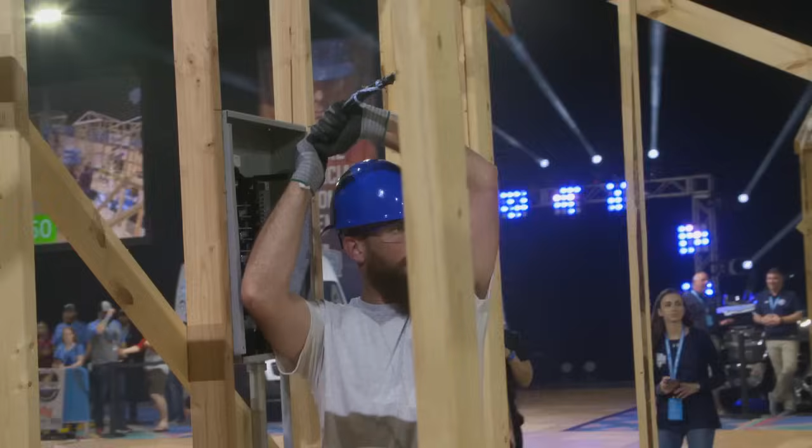The floor is set and the crowd is charged for the 2019 Ideal Electricians National Championship. Welcome, all you wire nuts. I'm Jason Benetti here with the always electrifying Scott Karen. The greatest electricians are here vying to be named this year's Ideal Electricians National Champion.

Scott, this year the competition is bigger and better than ever. And this year, Jason, on a global scale, electricians from 4 different countries have spent the past few months qualifying for a chance to compete for their share of over $600,000 in cash and prizes.

That's exactly right, Scott. Now here's what's in store for us today. We'll kick things off with the Student Apprentice School Challenge. We'll see the nation's top journeymen compete in the Professional Contractor Challenge. Then it's the Student Apprentice and Professional Individual competitions, and we'll round it out with that brand new competition this year, the International Finals, where the top electricians from the United States, Canada, China, and Australia will go head-to-head to crown the best electrician on Earth.

The National Championship is created by Ideal. It's for electricians, by electricians. And the school of the winning student apprentice team is getting 5 first-year scholarships for aspiring electricians.

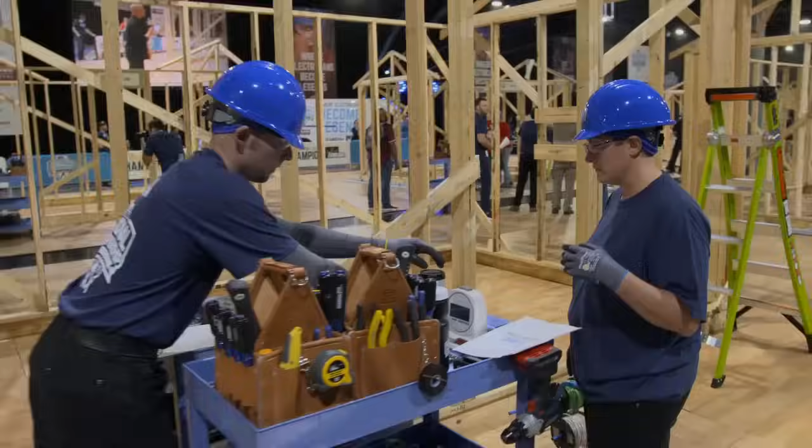All right, time to head to the floor. The student apprentice teams are about ready to kick off the school challenge. 2, 1. Countdown is on, and here we go. First step, they're breaking out the bundles of PVC to make sure they can start laying things out, measuring it. You can see he's got the electrical panel in his hand.

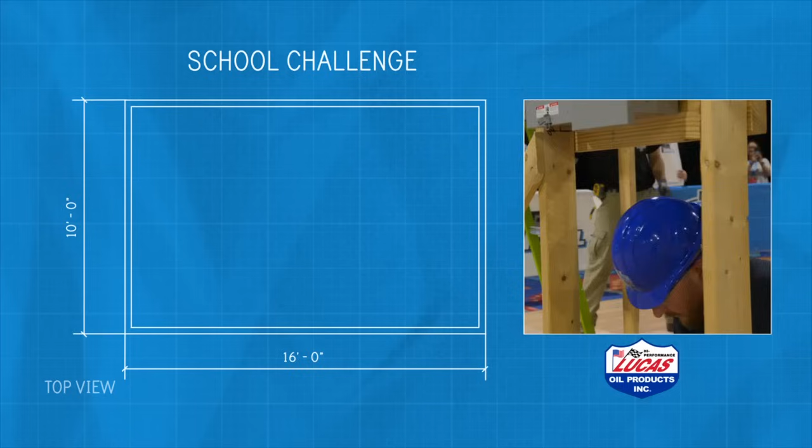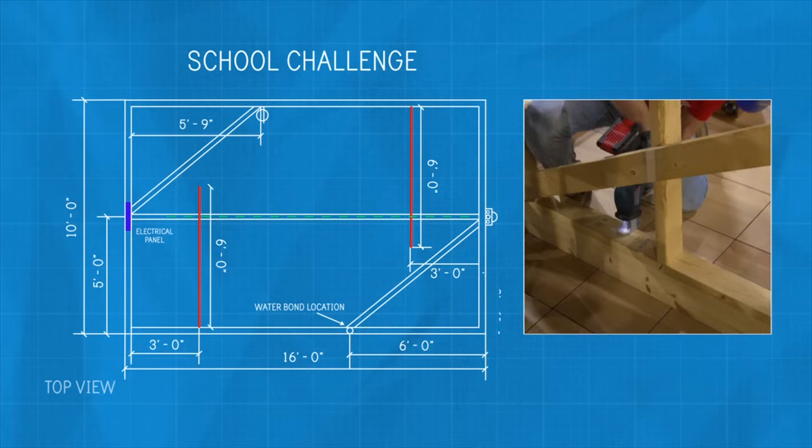Scott, let's take a look at the schematic breakdown of the Student Apprentice School Challenge, brought to you by Lucas Oil. For the Student Apprentice School Challenge, they're doing under-slab work on a simulated housing structure. They'll need to first install an electrical panel. From there, they'll run pre-bent PVC conduit to a service receptacle across the ground to the meter main. From there, they'll install a PVC stub, PVC conduit to the location of the cold water bond, and 2 raceways for future electrical installation. Conductors will need to be run from the meter to the electrical panel, ground rod, and cold water bond. For this, they'll have only 60 minutes. All work must meet National Electrical Code standards.

Let's meet a few student apprentice teams. Scott, we've got some new faces here up against some Ideal champions. Team 575, JATC out of Portsmouth, Ohio, Justin Donley and Jordan Finfrock. This is the talented duo. Jordan competed last year, and he looks ready to break out. This is Justin Donley's first year competing at championship weekend, but I'll tell you, these guys really have a good vibe together. And more talent from the north.

Team Clydesdale out of Minneapolis, Yufeng Yang and Brandon Moss. Appropriately named, too, because they are the dark horse. They've got the speed and energy it's going to take to tackle this thing. Don't count them out. We wouldn't dare do that. The Tenacious Turtles out of Minneapolis, Angela Bissonette-Penna and Jacob Thonis. These are the favorites this year.

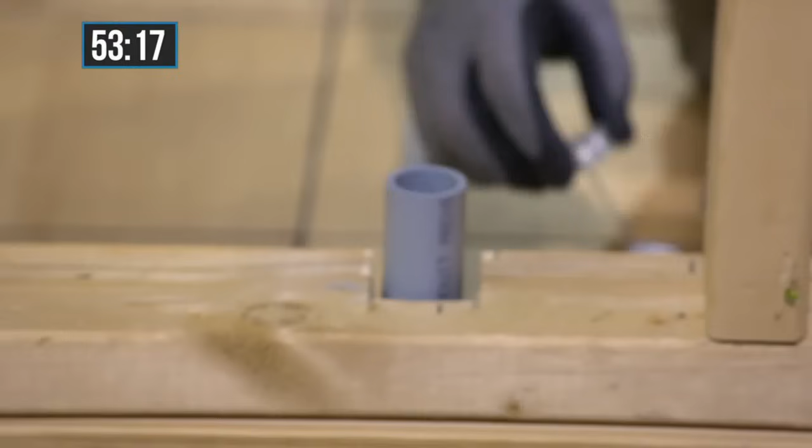All right, now Scott, they're working with some raceway here. Can you tell me what we're seeing? They're using PVC conduit right now, Jason, and what they're going to be doing is sealing it so they can get a really tight fitting.

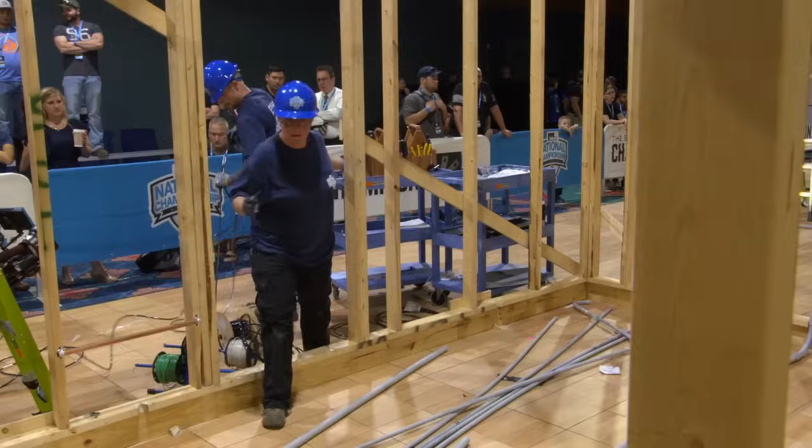The Tenacious Turtles are doing a great job here as well. You can see Angie, they're going to be sealing it with some PVC glue so you have no moisture getting in. When you're working with electricity, you can't have any sort of moisture in that PVC conduit. When you glue that PVC, it takes seconds to set up, and you can't undo it. They only gave him a little bit of pipe, not enough to make a bunch of mistakes.

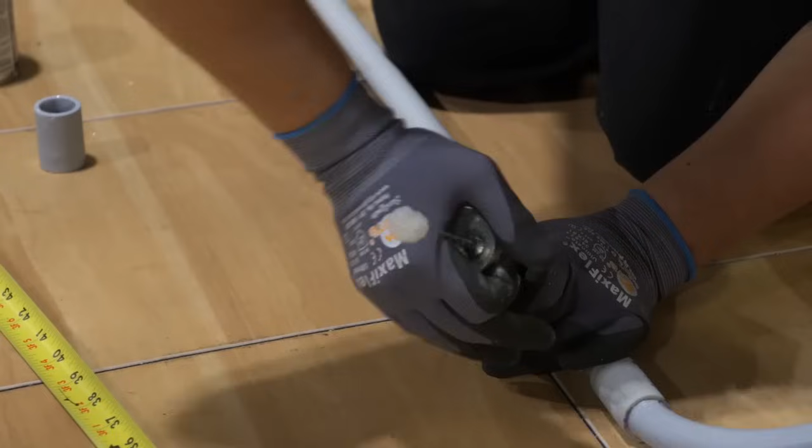You can see that Angie is making sure she's getting a nice tight fit on that pipe, and they got this stud knocked out. Looks like you came from the back, right? Yeah, and we're going down to the floor now.

Our third member of our team, Chip Wade, for an update about what's going on. Chip? The students and apprentices are really hard at work, and they've got a tall order. I can tell the thinking is just now starting to turn into action because their hands are all busy, and I can tell you they're all a little bit stressed. Back to you, Jason and Scott.

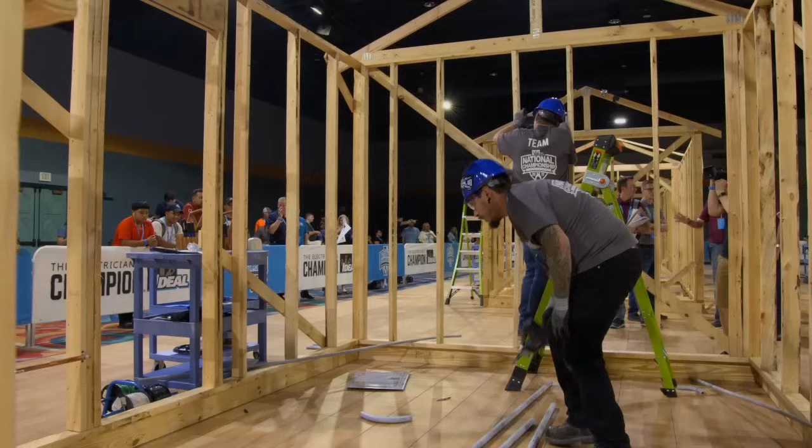Yeah, these competitors sure are pouring their hearts and souls into this competition. You can see it down on the floor. Now, in the electrical trade, electricians spend 4 to 5 years, depending on where you are, as a student apprentice, working and going to school simultaneously. Then, after completing the apprenticeship, they become professionals, known in the trade as journeymen. Becoming a journeyman is not easy to achieve, it's a big accomplishment to get there. They've put in years of tireless work and study to earn that license. So when they achieve that, they've truly earned something big.

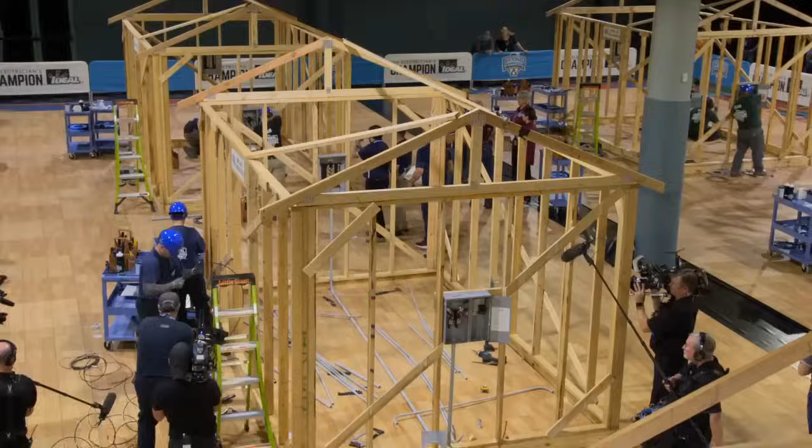The judges are accomplished as well. They're both union and merit-based electricians and instructors selected from training schools all across the country to be a part of the championship weekend. When we come back, we'll find out who wins the hard-fought Student Apprentice School Challenge.

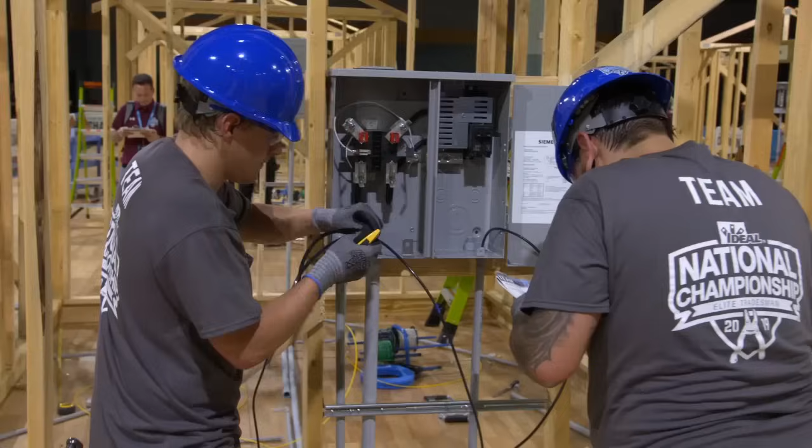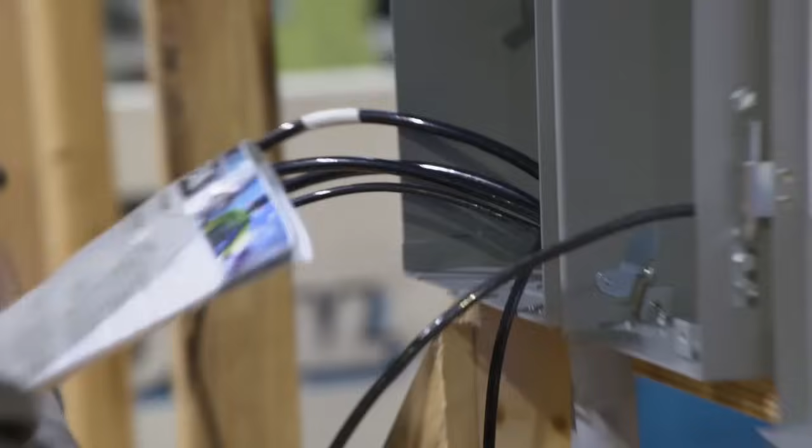And there's Daniel Becerra, who can be seen in that series working today alongside his teammate Troy Kanan as they're putting the finishing touches on their build-out here in the Student Apprentice School Challenge.

We are in the final moments, 20 seconds remaining. What are the finishing touches here? You got to get those wires on the devices right. He's torquing down those lugs. Once you set the torque, you're supposed to write the torque on the panel itself in marker, and you can see that he's really wrestling with that wire, making sure that everything gets bent and put in there.

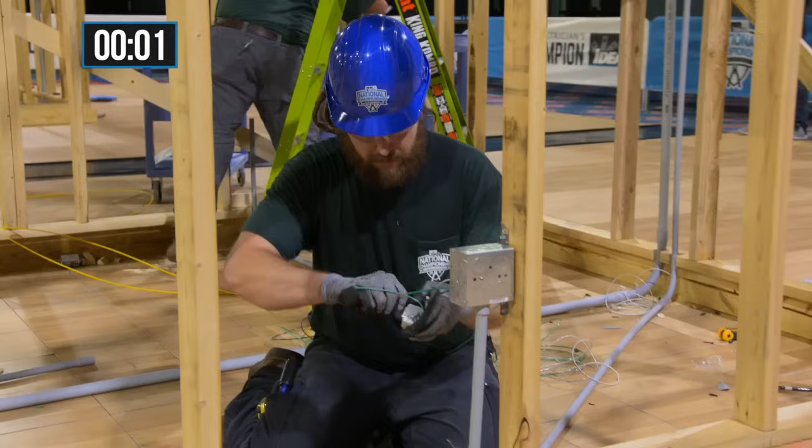5 seconds left. Remember, time is just a portion of the score, but we have hit zeros, and boy, are they wiped. Throwing their screwdrivers down, Jason, and you can see how it's a lot of work, and they finally get to look up at all their fans, give each other a high five. That's nice, really nice to see. Good camaraderie from the teams as the competition comes to an end.

Now, because no teams finish, they'll all lose points for time, but remember, time is only 10% of the final score. Judges are doing a final review on safety and overall craftsmanship. The Student Apprentice competition is now in the books.

Our own Chip Wade has the winner announcement. The winner of the school and team challenge are the Tenacious Turtles, Angela Bessonette and Jacob Becher. Congrats to the Tenacious Turtles. They won $20,000 and are bringing 5 scholarships back to Minneapolis JATC.

Such a great competition, and here's a look at how they finished.

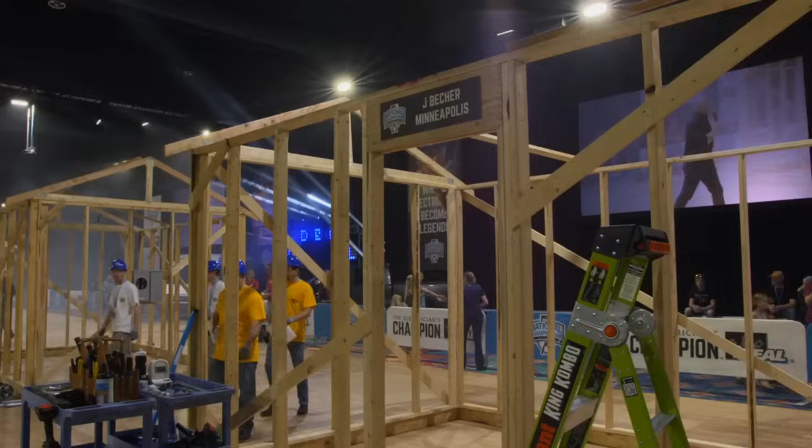Now moving on to the Contractor Challenge as these pro competitors are heading into the arena now. Last year, this event was so grueling that no teams finished. This year, however, they're in 2-person teams. They're doing under slab work, basically on a simulated housing structure. They'll have to complete the same steps as the apprentice teams did, installing conduit for future electrical installations and conductors as well.

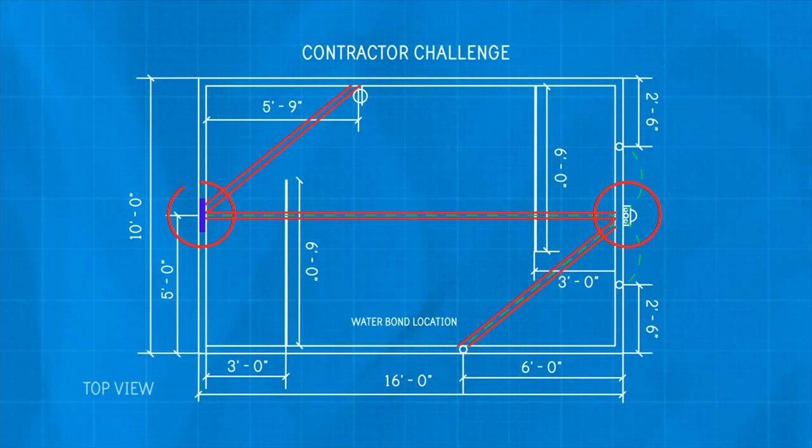Additionally, the pros will need to install a grounding bushing on both ends of the conduit. For this, they'll only have 60 minutes. All work must meet National Electrical Code standards. Who wins? $40,000 plus for their contractor ideal cash and a 2019 Ram ProMaster.

Kellenberger Electric, the favorites this year, having won two years in a row, but the three-man team has been forced to split into teams of two this year, and now we have former teammates going up against one another. Greg Anlicker and Will Barnett are sticking together, leaving their powerhouse Clay Noga with a new teammate, Keith Runkle, and that could be an opportunity for an upset across the board.

The pro team's competition is set. Let's head down to Chip to kick it off. 4, 3, 2, 1, go! And off we go.

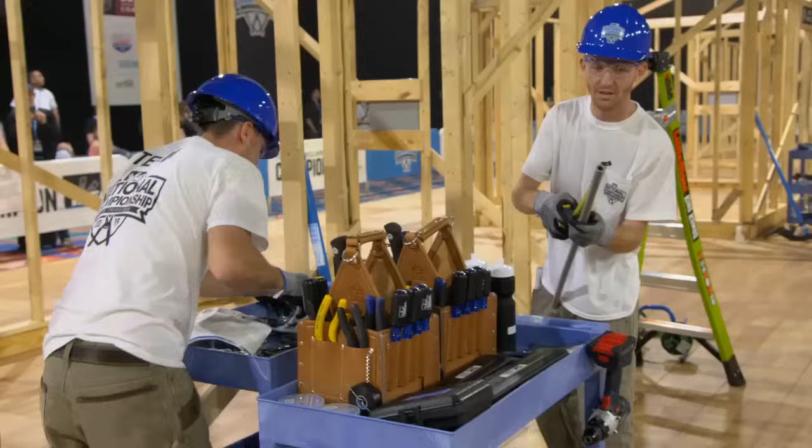What's the first thing we're going to see in this competition for the pros? They each have their tasks, and they're running out to grab them. You can see they're grabbing the tools that they need to get into that room and get started. They got pipe and drills to set up, so here they go.

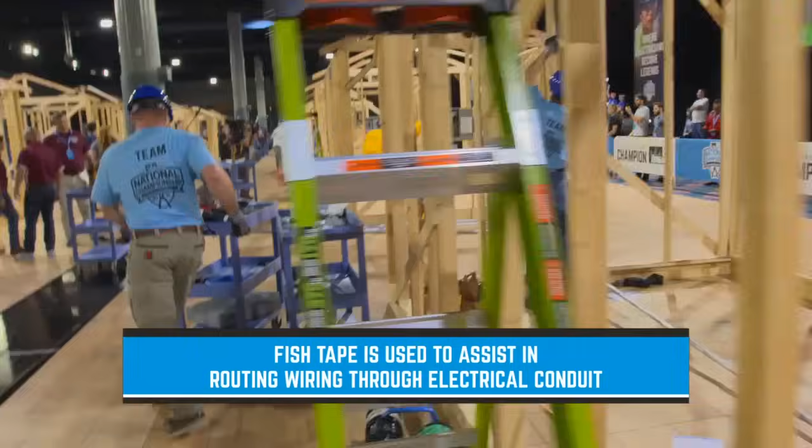All right, what are we seeing right here? So he's knocking out the bottom of the electrical panel with his journeyman's pliers, the knockout to put the pipe inside there. You can see he has his fish tape. They're not ready for these tools yet, but they're getting them into the respective locations where they're going to need them. That's part of setting up for work. You can see they got everything lined up.

Here's the All-Stars out of Minneapolis, Minnesota. Michael Fox and Andreas Penna. Their strengths being determination and efficiency. Did you just see how he's trying to put everything he's got?

It's taken two of them. So that is one-inch rigid metallic conduit. You can't get any stronger than that. That's really tough. And you can see they got two people on that bender trying to make that 90-degree connection.

Watch Jeremy Welly working on that panel, and down it goes. Things like that are going to slow them down. They don't have a lot of time here.

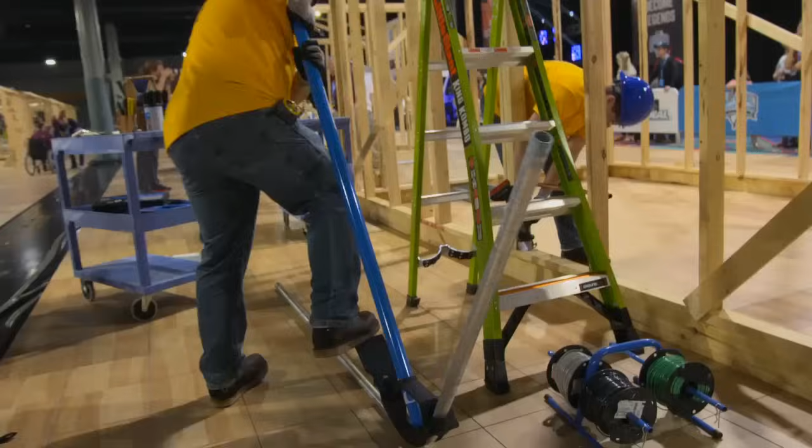That right there is Kellenberger 2, Keith Runkle, Clayton Noga, the team that was split up from last year. Jeremy Welly in the gold there. Jay Beecher, Minneapolis as well. He's wrestling with that knockout.

So there's only two pieces of metal that knockout is being held in by, and they've got to fatigue the metal with the pliers, and that's how the knockout comes out. Kellenberger 1 out of Elgin, Illinois. Greg Anlicker and Will Barnett. Kellenberger's won two years in a row, but that was when they had a team of three. This year they're down to two and are now up against their former teammate Clay Noga on Kellenberger 2.

Pushing that in. Look at the amount of pull on that fish tape. So he's got to do everything he can to push that into the pipe. And then on the other end, he's doing everything he can to pull the wires out of the pipe.

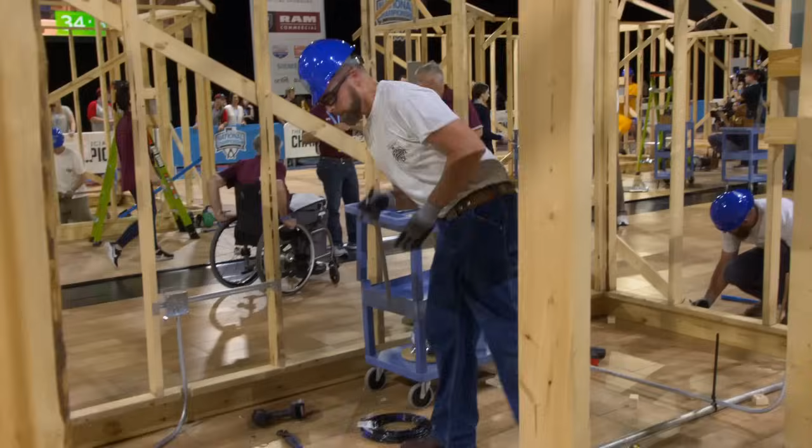So he's got an extra conductor. Is it possible that he forgot a conductor and now he's trying to add it in after the fact? That's what it appears to be. So how hard is that to do? Really hard. A lot of times you're better off just removing the wires and starting over again. Yeah, that's what he's doing. He's actually pulling in another conductor that he must have forgotten.

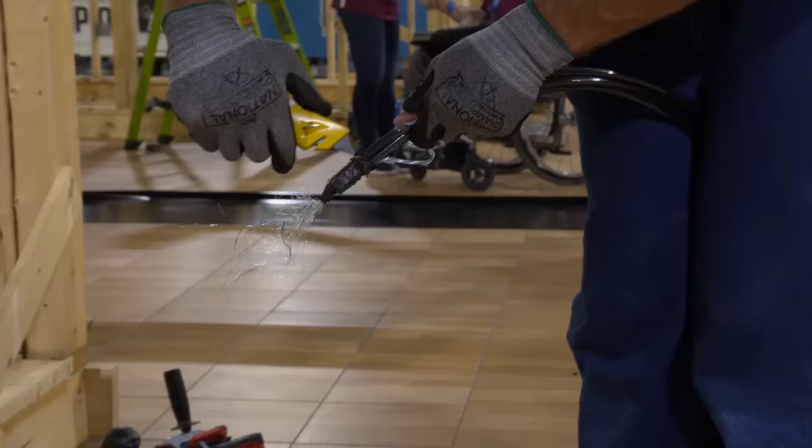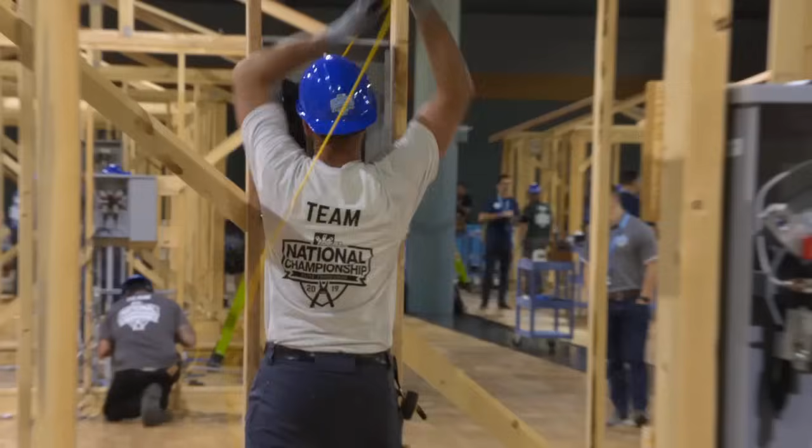This is a tough competition. We may not have anybody finish. A job like this, Jason, is something that we would have the better part of four hours to complete during a normal installation.

Final 40 seconds in our pro team competition. Look at how much force he is pulling that wire. Greg and Will, defending champs. I mean, these guys are almost 6 feet tall, and they're pulling those wires with all the strength they can muster out.

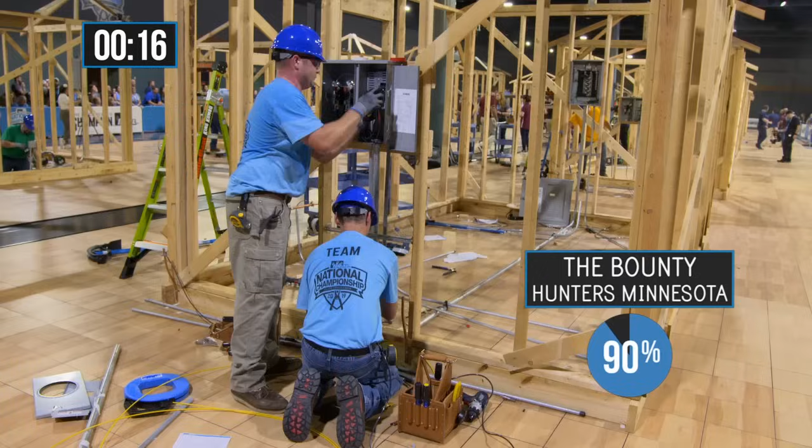They will remember this forever, whether on video or just in the burn in their muscles. 20 seconds to go. Look at how hard he's working. These guys are sweating. This is a triathlon here. These guys are working as hard as they can. You can see they're not looking up, not enjoying this at all. This is work. Your shirt is two different colors, you're working so hard.

5 seconds to go. We're coming down to zeros, and that is it in the pro team competition. We have one team that only finished. One team finished, and they're downstairs with Chip.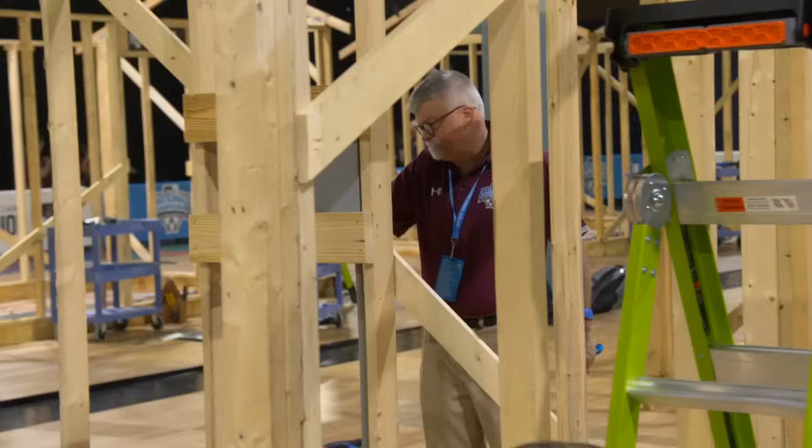How are we feeling? Pretty damn good. Tired. Did you guys finish before the time ran out? Barely, yes. How much time did we have? Wow, I don't know. What do we got? 17 seconds. You were the only team that finished. Only team that finished? What? Well, you guys did awesome, I can tell you worked super hard. Yeah, thank you. Nice job. Thank you, thank you.

Here are the initial rankings for the pro team competition based on finishing time. Judges haven't yet weighed in on safety and overall craftsmanship, so it's anyone's guess who comes away with the win and a Ram ProMaster. Let's head down to Chip Wade with the winner announcement.

Chip, and the winner of the Contractors Challenge is Kellenberger #2. Come on up.

Congratulations to Kellenberger #2. They're going home with $20,000 each, and to their contractor, $20,000 in Ideal cash as well as that new Ram ProMaster.

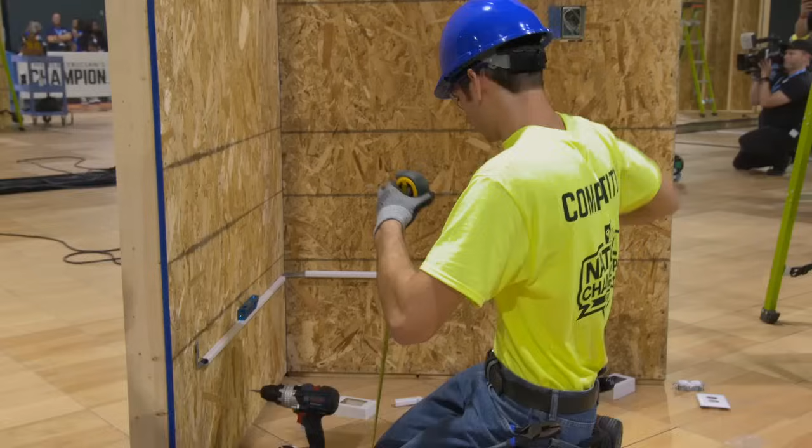The top 30 were cut down to 10, and after a hard-fought Student Apprentice semifinal, the final round is set. Here's a look at the 5 Student Apprentice finalists. 2018 champ Benjamin Budd is back looking for a repeat. Hot on his heels is Marty Evans and Michael Zarenda, followed by Jordan Finfrock and Timothy Emerson.

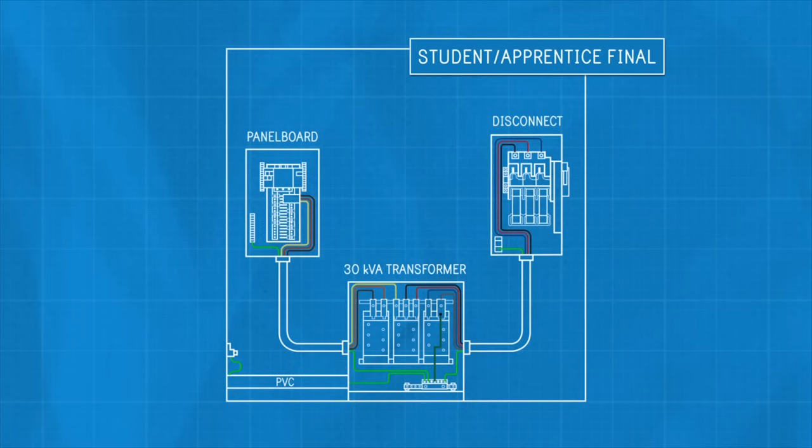Here's a look at the schematic breakdown of the Student Apprentice Finals competition, brought to you by Lucas Oil. Student apprentice competitors will be installing the 3-phase 30 kVA step-down transformer. Challengers will need to drill holes in the panel board, transformer, and fuse disconnect enclosure, properly size and install primary and secondary conductors and raceways. Cut, run, and mount all conduit, size and install conductors according to their assigned color codes, and properly size and install the system bonding jumper and the grounding electrode conductor. For this, they'll have only 70 minutes. All work must meet NEC standards.

All right, time now for the individual apprentice finals. Benjamin Budd, last year's champion. Countdown is on, and away we go.

What are we looking at here in this competition? They're taking a higher voltage located in the panel board on the left there. It's 480 volts. They're going to feed that voltage down into the transformer, which is a 30 kVA transformer, and it transforms it to a lower, more usable voltage, feeding it into the disconnect. From that disconnect, you would normally see it feeding a piece of equipment that specifically uses that type of voltage. Has to be color-coded correctly.

Very important. How about Marty Evans already looking to his left? It's tough not to pay attention to what the other guys are doing, they're in close proximity here. No doubt, it's easy to get distracted. You can see right here he's working on getting the hole cut in the side of that transformer. That's pretty thick gauge metal, and that hole cutter does a great job plunging right through there.

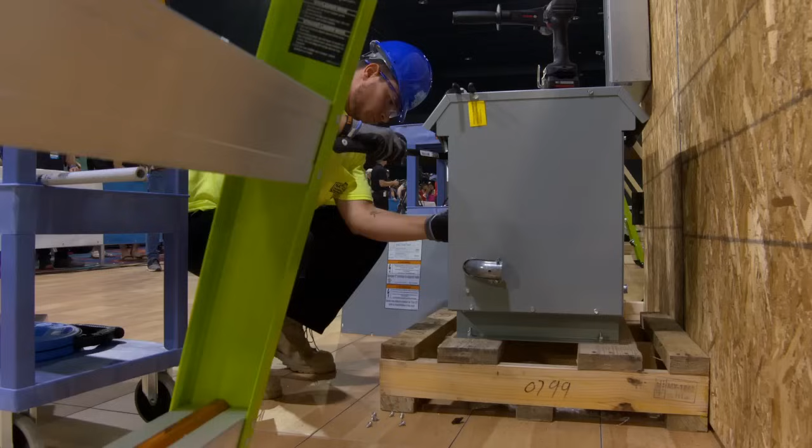What's good craftsmanship there, what are you looking for? Well, you've got to really pay attention to where those metal shavings are going. You don't want those inside the transformer, they can conduct electricity, and that's not good.

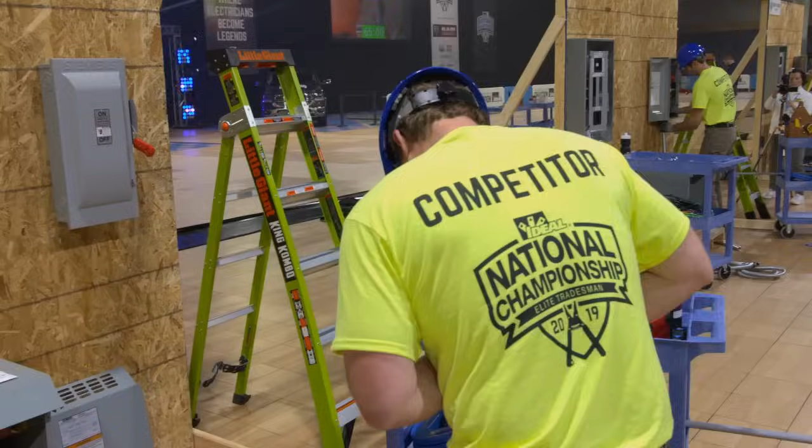So look, Marty Evans has been here before, he knows the feeling, Benjamin Budd as well. There's got to be some value to these guys doing it individually and having been here before. Certainly is. Right now they're setting up to the panel itself. The second phase is going to be pulling the conductors, identifying which conductors go where they land, what color orientation they are, what colors they actually are. There are different colors for different voltages.

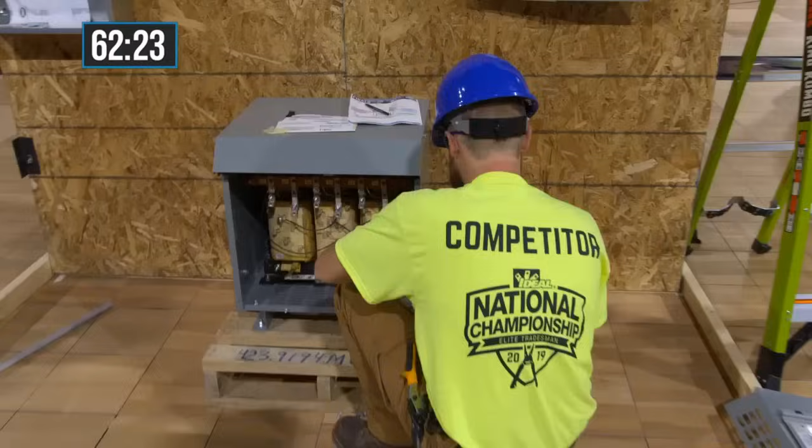There's Jordan Finfrock, we saw him earlier in the team competition. You can see him working on the right side with his right hand, and on his left side he's basically attaching a connector so he can connect that flex. It's flex, a little easier to work with than conduit.

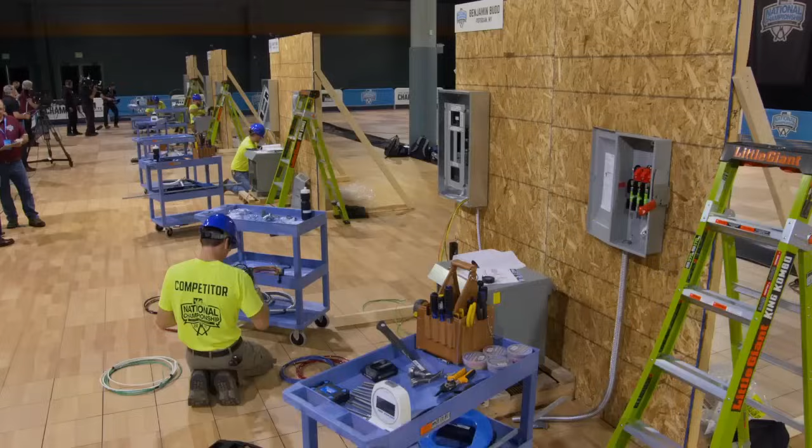How about the saw technique here? I like it, I really do. He's cutting across two of those splines - that's how you separate that flex, by cutting at an angle. Now he's pushing the wires through the flex. With flex, there's no pipe bending, so they're able to put that wherever they want. They just have to secure it in the proper location.

Marty Evans down to the knees there. He's got tools everywhere. See what happens when you put down a tool - it looked like it rolled off someplace, but when you put down a tool, it just disappears.

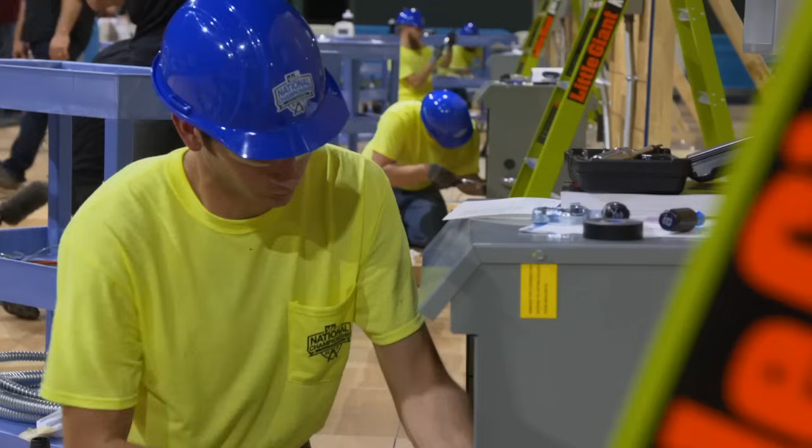He's looking for the socket required to tighten down those lugs - basically an Allen wrench on a 3/8 drive socket. Now that's something everybody can understand, looking for a tool and having it right under your nose. Always the way it is. I got a pretty big nose, so I usually figure out where the tools are. Every tool is under your nose at all times.

And as he's looking for his tool, Benjamin Budd, who won last year, is just about finished. He is done! Benjamin Budd just clocked out. It's real nice to see the pros rooting on for the students and competitors right there.

How you feeling? Not too bad. I've done them before, but it's not something I do every day, so I had to make sure I thought about it as I went through it. I was just trying to make sure I didn't miss anything and go through it nice and easy. We're proud of you, man. Oh, thank you, best of luck. Thank you, thanks. He's so cool and calm, man, he just finished quite a workout right there and he's still mellow.

I like that, Benjamin Budd is celebrating his early finish. Now remember, finishing first is not the only thing - time is only 10% of the final score.

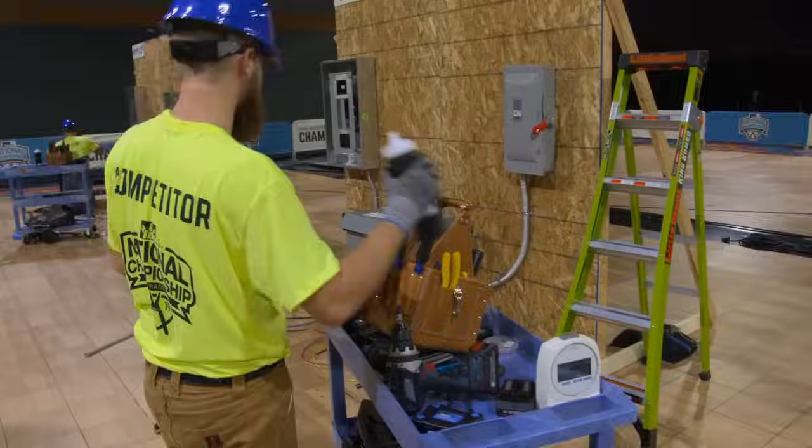Jordan Finfrock's trying to button everything up and come back in this competition. You can see he's doing a great job making sure everything gets back in its place on the cart. He hasn't forgotten anything. He could have a circuit breaker in his pocket - looks like he checked to make sure he didn't. Always good to check and see if you don't have a circuit breaker in your pocket.

Words to live by. 30 seconds. You're my man, Blue, we got an old school fan in the crowd. Very nice. 20 seconds remaining.

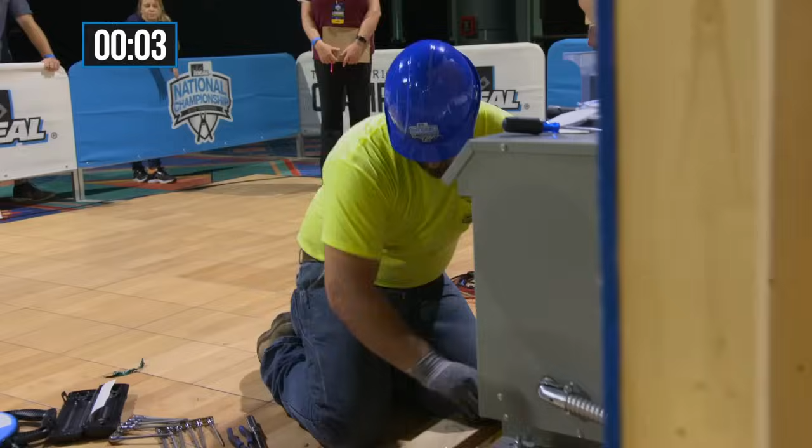Michael Zarenda still doing some work, Timothy Amerson as well - geez, it looks like he's looking for something too. Right now he's making sure all the wires are landing where they're supposed to be landing. With 8 seconds left, there's not a lot he can do at this point. He's giving it all he can. Fans are on the edge of their seat. 2 seconds, 1, and that is all.

The individual apprentice competition has come to an end. A great competition, big standing ovation for everybody.

Here's the order of finish in the apprentice final. But again, don't forget, finishing time is only the start and part of the equation - the judges are doing their final review on craftsmanship, quality, and safety. When we come back, we'll find out the winners of the individual apprentice competition. You're watching the 2019 Ideal Electricians National Championship.

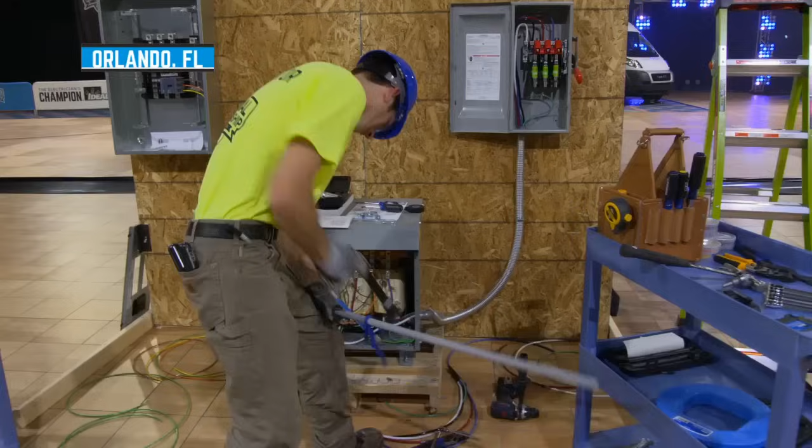We are back at the Ideal Electricians National Championship from Disney's Coronado Springs Resort in Orlando. It was a close finish for these 5 student apprentices. Defending champion Benjamin Budd faced his toughest competition yet against the other top 4 challengers, who all made their first appearance in these student apprentice finals.

It's time for the results. Let's head down to Chip Wade, who's got them for us. Chip. Third place in the student apprentice competition goes to Marty Evans. Come on up. Congratulations.

Second place in the student apprentice competition goes to Benjamin Budd. Nice job, congratulations.

And the winner of the student apprentice competition is Jordan Finfrock. Congratulations to Jordan Finfrock from Portsmouth Electrical JATC Local 575 on winning the student apprentice competition.

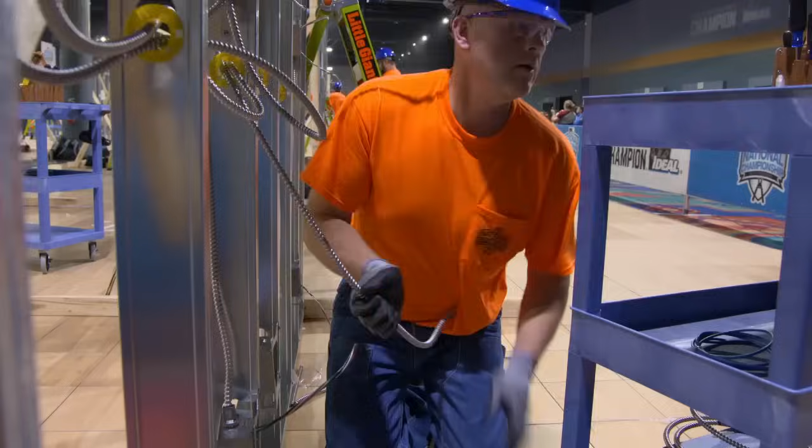This year's pro individual competition saw a record number of registrants attempt to qualify, but only 30 made it to Orlando. The top 30 were cut down to 10, and the pro semifinals was the toughest one yet. It's a huge accomplishment to make it this far, but only 5 will advance to the final.

We've got some familiar faces in the pro finals. Scott, your thoughts? Some of these guys have worked together in the past, now they're competing against each other. Joining them is 2017 third-place finisher Seth Agnew and newcomer Lee Lewis. That's a tough lineup right there. It's anybody's game right now, Jason.

Yeah, it sure is. These top 5 pros are going to throw everything they've got at the final round when the Ideal Electricians National Championship returns.

The electrical trade tackles a wide assortment of projects, some small, some large, and sometimes, as in Texas, they are huge. Let's take a look.

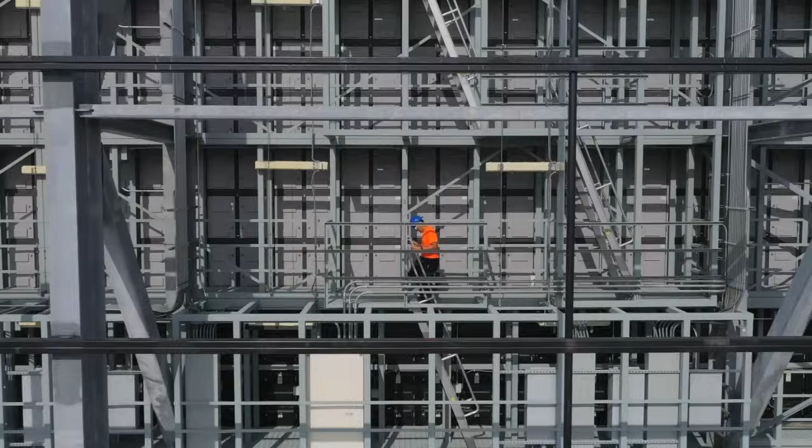We do everything bigger in Texas. We are at Texas Motor Speedway in Fort Worth, Texas, home to the Guinness World Record holder, Big Hoss, the largest LED HD video board in the world. My first 6 months in the trade, I fell in love with it. 19 years later, I still love it. They'll have us here on standby for NASCAR races, Indy races, whatever the events may be. That's game day for us. And you're working on the largest video board in the world, so we take a lot of pride in that.

There's Jeremiah Bibby, just featured in Wire to Wire, eliminated in the earlier rounds, but still supporting these finalists.

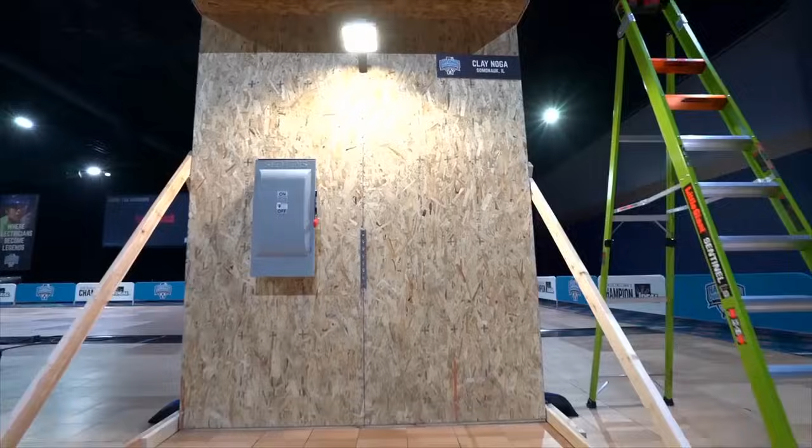The task at hand for the Pro Finals will require completing the electrical installation for an extension on an existing commercial building complex. They'll need to install a meter enclosure and connect a 4-foot rigid metal service riser with weatherhead and proper strapping, as well as to the service disconnect itself. 2-inch rigid metal conduit will run from there to the main lug electrical panel, where they'll install 8 circuit breakers. Finally, conductors will need to be installed in the service drop, a grounding electrode system, and be properly identified, terminated, and torqued. For this, they'll have only 70 minutes, and all work must be done to National Electrical Code standards.

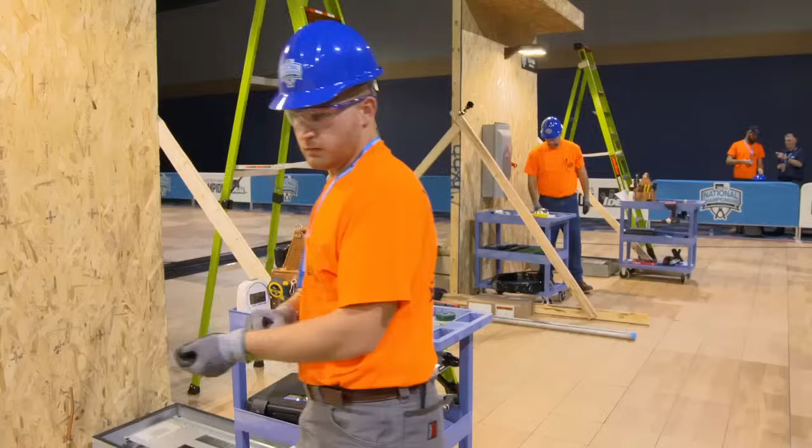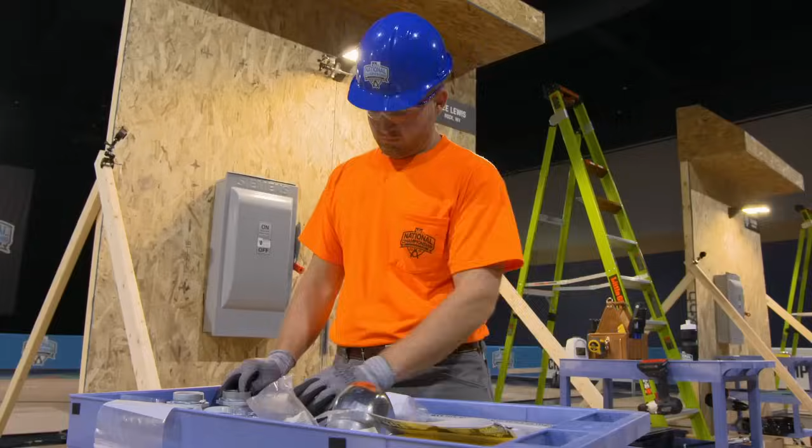Time now for the Pro Individual Finals. Can anybody take down Greg Anliker is the question. Lee Lewis, the newcomer to the finals, but Greg has done it twice, and he is studying up before time hits. 7, 6, they're checking everything out, making sure they have everything. 3, 2, countdown's on, and off we go for the Pro Finals.

So you can see here they're grabbing the tools that they're going to need out of that bag. They're putting them in their pockets, breaking out knockouts. They're right at it. These guys are pros.

In a finals situation, you have some people who've been here before, but you have so many different paces, tempos, strategies. You see Seth Agnew going at a pretty high rate of speed, other guys more deliberate. Certainly everyone has different techniques. Seth is working what he has, getting the piece of equipment level there, which is really critical.

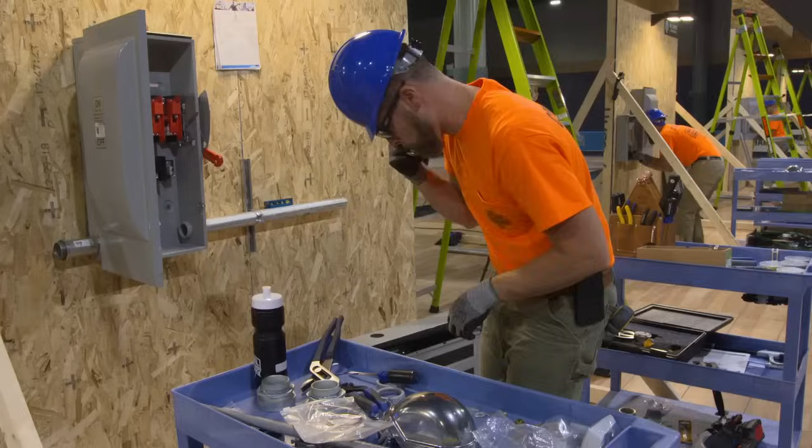What piece of equipment are we talking about? The disconnect. He was working on the electrical panel, going to the mouth there to carry a couple things for himself. Yeah, making sure that everything's in place. It's a third extremity, right? He's using that as another vice to hold stuff.

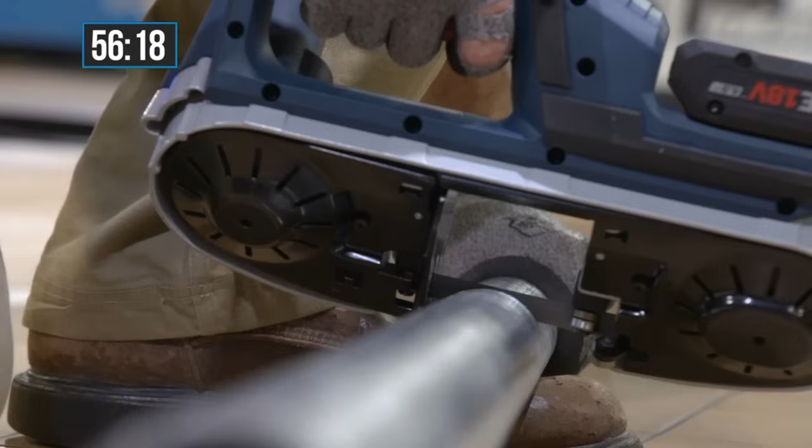With all the pressure, you get a little hungry too while we're here in the finals. Cutting through that steel conduit, 2 inches. It's taking that portable bandsaw everything it has, but it does a nice, fine, efficient job. It's just changed everything. How so? We used to cut that by hacksaw when it first came out, and that's a lot of back and forth for your elbows and your shoulders. This bandsaw, one motion, battery powered.

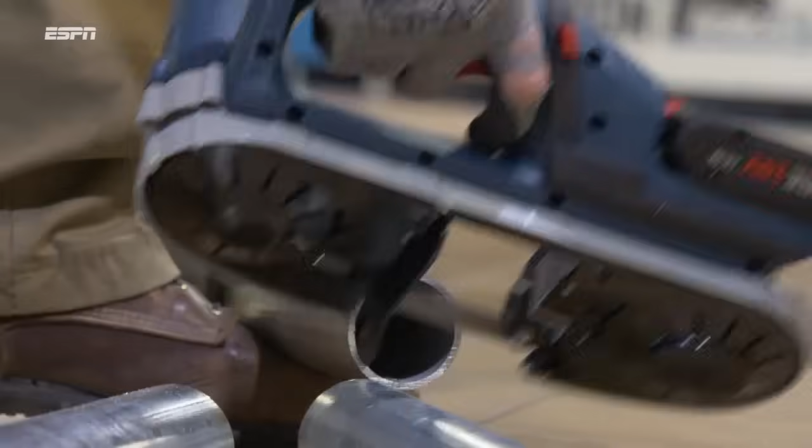The batteries can be used with the drills and everything, so it's real nice. Here's another look at it, straight on through. It's just amazing what technology has done for us. As electricians, we can use that to cut conduit and wire and do so many versatile things.

He's getting rid of the burrs on the pipe with the file, making sure it goes right into the connector. When you cut that with a saw, it leaves real sharp ridges, and they have to deburr it. It's part of protecting the wires on the inside so they don't remove the insulation, and also to get it into the connector itself.

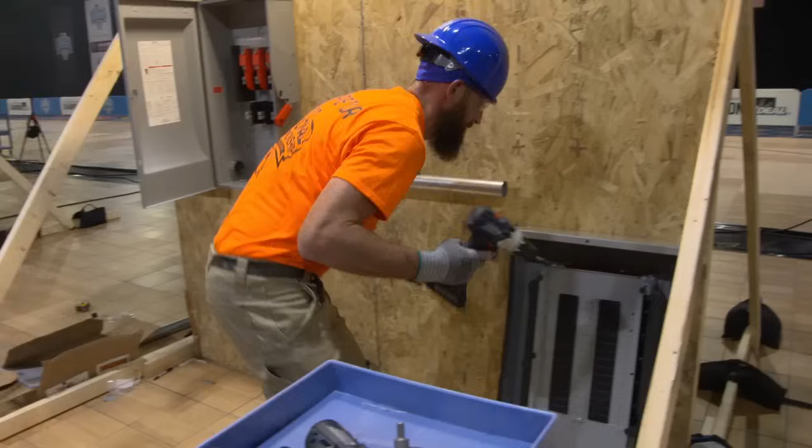Will Barnett, Greg Anliker, guys who know each other very well. Look at Seth Agnew.

Jason, one thing - that panel weighs almost 60 pounds, and he's working it up on that wall, securing it to the wall itself.

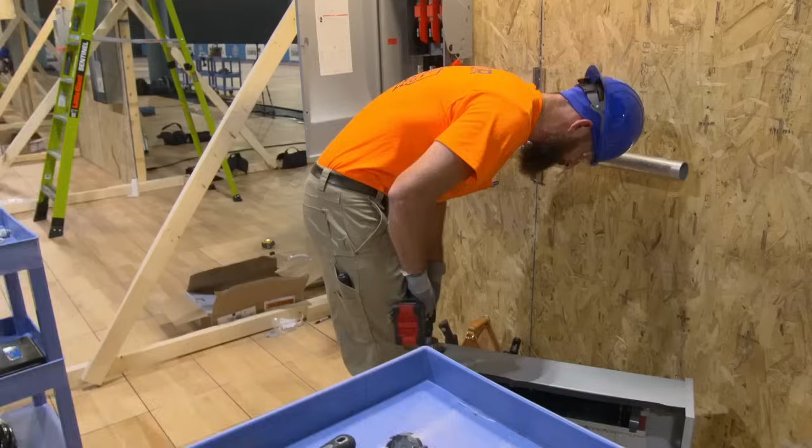Let's go to Chip Wade, standing by with a member of the judging team to get some insight on what they're looking for. There's so much to judge in these competitions once the competitors are finished, but what do you look for while they're working? We're looking at their work practices, how safely they're working, how they use their tools, are they using the right tool for the right job. So there's a lot on the front end and a lot on the back end.

Well, you have to keep your eyes on them. I'm going to let you get back at it. All right, thanks so much.

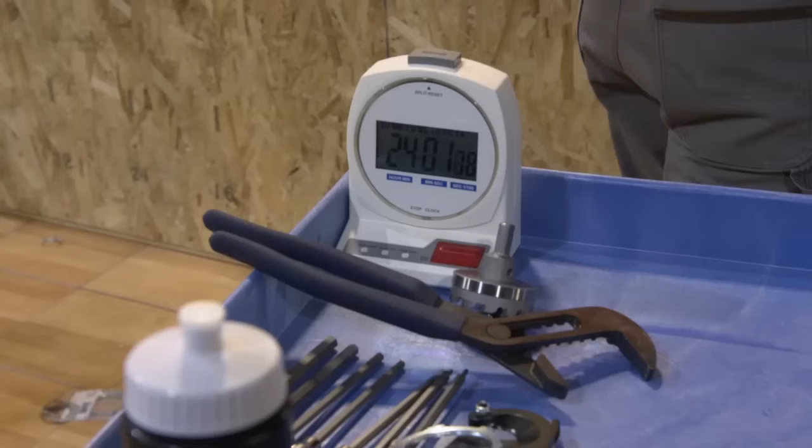What we're looking at - where is it in a house or a business? This is a typical application in a small commercial building where power comes in down into the meter socket, and then from the meter socket it goes over to a disconnect, and from the disconnect it feeds over to an electrical panel. Now all of these things are rated 3R, which is weather resistant - rated to be outside, exposed to the elements.

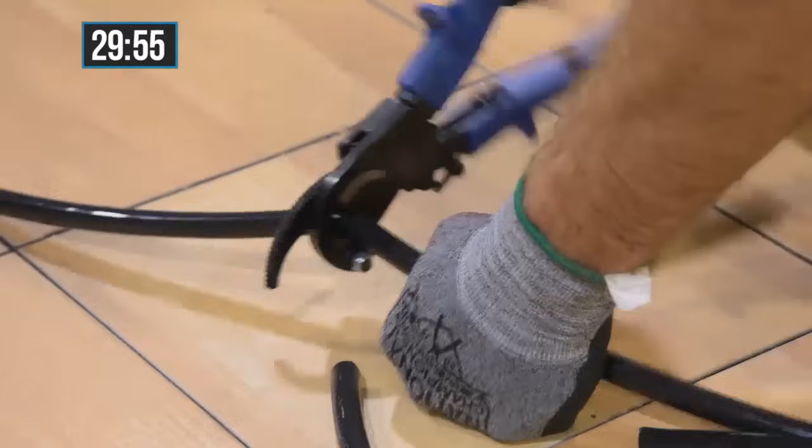That's what it is. How about Seth Agnew? He's using those ratcheting cable cutters, which is a great product for real tight spaces. But he's using a lot of energy here - you can see where he's just wrestling with those wires.

Let's watch it again in fast motion. He's just kicking that wire around. He made an obstacle course for himself, basically, is what happened.

What we have here is he's attaching those circuit breakers to the bus with a power drill. Saves a little bit of time, saves your wrist, and it's real important that those get tightened down.

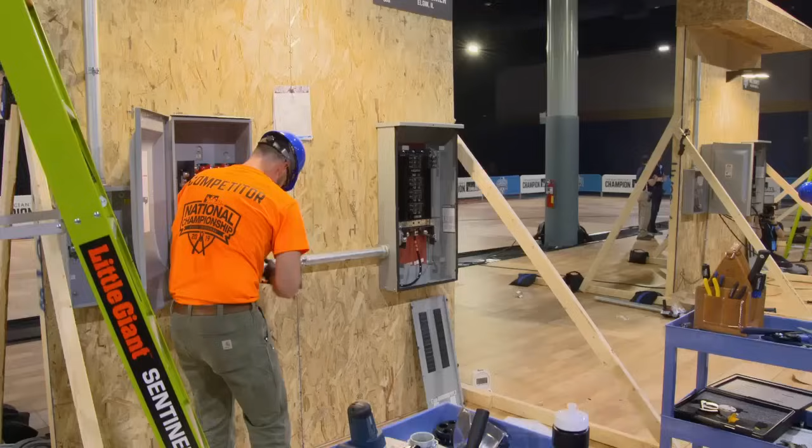Seth Agnew, he's basically sprinting through this whole competition. He is flying - he's working real hard, giving it everything he can. He's working fast, and you can see Greg is just a little bit more calm, taking his time.

All right, Lee Lewis, once again all these guys are using their mouth to hang on to a tool. Well, you don't lose a marker if it's in your mouth, that's for sure. I'm not sure what it tastes like, but - what's the marker for? The marker is for identifying what phases go where. We use markers every day, I have one in my pocket right now. I was going to say, people can't see you just reached into your pocket and pulled out a marker, so you must be an electrician. Well, I certainly don't use it to sign autographs, but...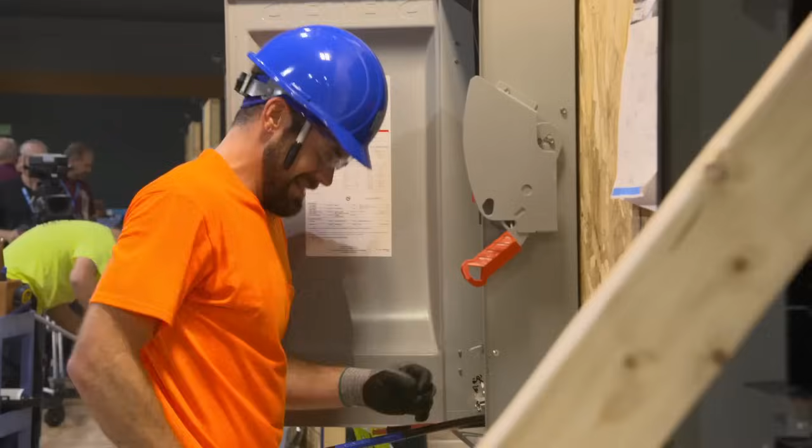Somebody from the crowd just yelled, 'Send me to college, Dad.' Become an electrician's son - nice response. That is a great response. That is the thought philosophy that we need in these trades right now.

Well, you got the combination of sheer focus, but also wit while he's doing this. Pretty awesome - wow, that's a lot of work. He's trying to slam that wire up, it's getting stuck. Again, those are real thick, heavy copper wires. You're wrestling with these, using a lot of forearm strength.

And here you go, Greg, using that bandsaw again to cut the wire. Boy, that's using your head. He's real cool and calm and collected.

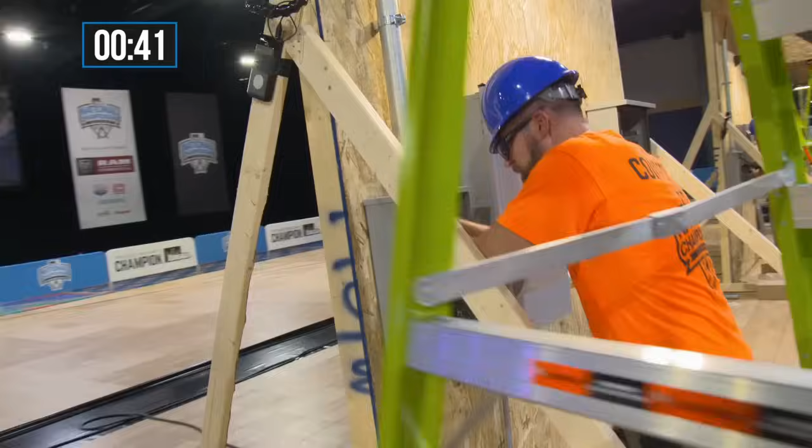So right here, Seth is using the dead front cover, and he's trying to position those breaker blanks in the right locations. It looks like he might have got it upside down at one point. Those black spacers are supposed to be put in where there are no circuit breakers. Under 40 seconds to go now.

Greg Anlicker trying to put those finishing touches on in hopes of a third individual championship. Look at that hard work from Seth Agnew. Elbow grease all over the place. He's setting the torque on that wrench.

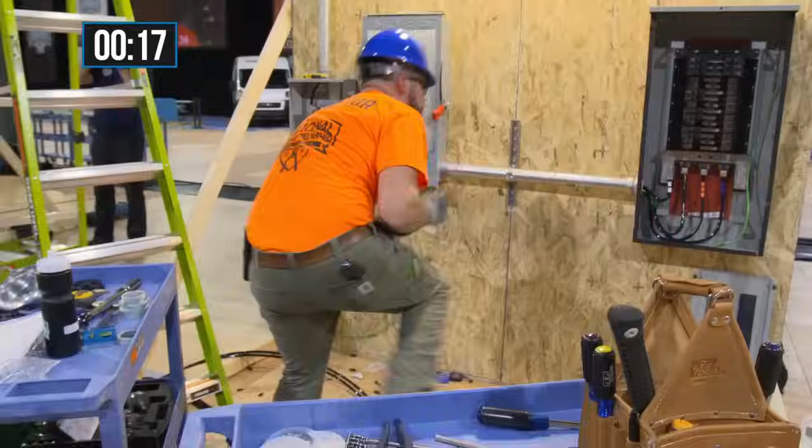You have to pull back the collar, twist it to where you want to go, and whatever value it is, when you release it - that's important to do. So you see here's the marker, Jason - danger, high leg. One of the three legs has a higher voltage to ground than the other two, and it's identified in the code that you have to identify that leg, which phase it is, and he did that.

With 3 seconds to go, 2 and 1, and that is it. The Pro Finals have come to an end, and exhaustion for everybody. An hour of sheer craftsmanship comes to an end as we go downstairs after a big hug to Chip.

Greg, you all kind of came down to the finish line at the same point. At least you and Seth were neck and neck. What did you have remaining? What were you not able to finish? I have black, red, and blue phase going up my aerial mast. Other than that, I believe I'm 100%. Wow, I'm sure the quality is awesome, but it's going to be up to the judges to figure it out. Best of luck, and congrats, Brad. All right, thanks. Awesome, man. Thank you.

Now it's up to the judges to figure out who is our champion. They'll all lose points for time, but there can only be one pro competitor headed to the international finals. Let's head to Chip Wade with the announcement.

The top 5 competitors, come on out. And now a winner has been chosen. And the winner

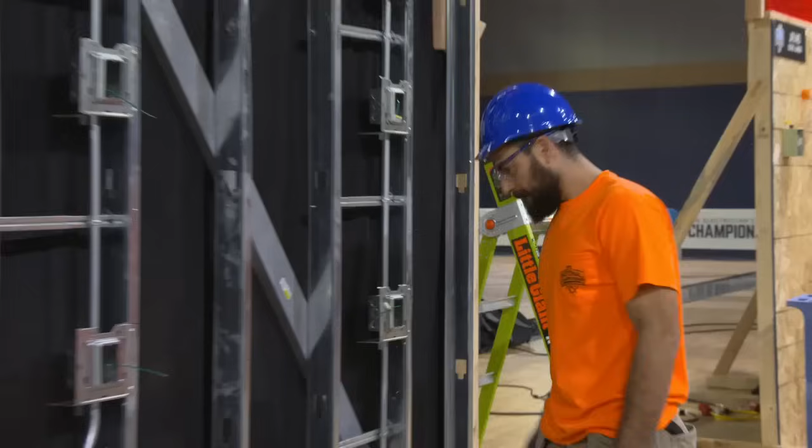The top electricians from the United States, Canada, Australia, and China will be completing challenges from each country's electrical standard. They're all doing the same task, but from different countries' electrical codes. So the challenge here isn't the intricacy, it's the unknown. On the Chinese and Australian panel, they're doing a circuit run to an outlet, switch, and junction box. On the Canadian and United States panels, both use EMT conduit, metal boxes, and THHN wire.

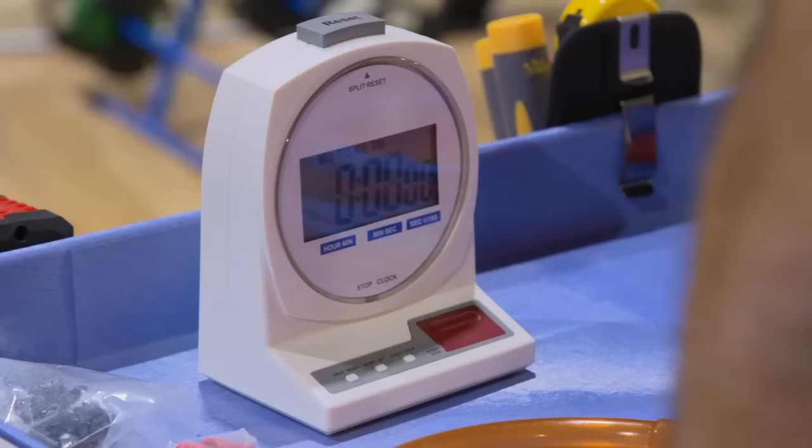They'll also run a circuit and pull conductors, then terminate and energize the panel. Here at the top of the challenge walls are the flags of each country. Once a competitor completes that country's challenge, they can move on to the next one. If their circuit is connected properly, the flag will light up when it's switched on. We're about to determine who is the world's best electrician. 5, 4, 3, 2, 1, go!

And we are underway for the first international contest in Ideal Championship weekend history. Greg Anlicker, diligent but also happy because his pockets are filled with money - $75,000 in the U.S. Championship. Of course you'd be pleased.

But here, this guy, Paul Hanania, Calgary, Alberta. He is a jiu-jitsu champion as well. Very skilled in the craft, but he's also very organized and focused. Working with this plastic boxes, it's pretty cool. It's even very unique for me. It's all clear, so you can see what you're doing, where the wires are going. Jifu Wei defeated 1,500 hopefuls back in China, and now he's in Orlando.

The Chinese champion, 23 years old. Agility, energy, he's got that youthful understanding. And by the way, we were talking about this earlier, to have young people into this industry, into this competition is great. Yeah, it's fantastic. This guy is super quick.

Meet Tom Maddock, the Aussie out of Melbourne with the big old beard. He's a general contractor, and he's 6'5", and the question is, does he even need the ladder that they've given him? And the other question is, if he wins the truck, will he fit in it? I'm not sure about that, but he does have an eye for detail. Speed might not be his strong suit, but he doesn't do something if he can't do it right, which is a good quality to have in this competition.

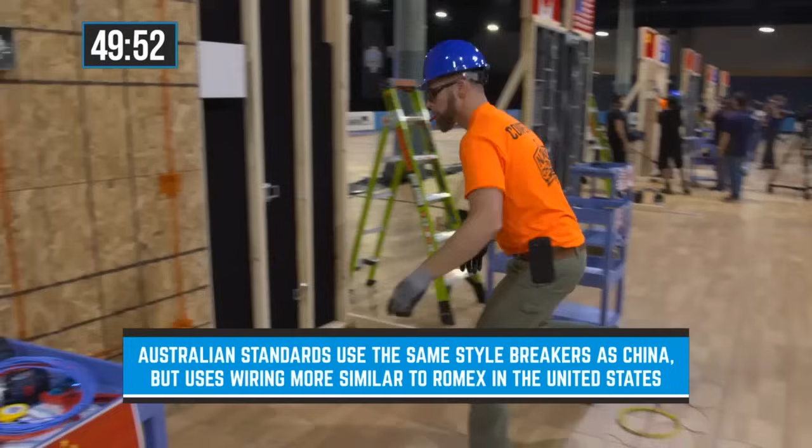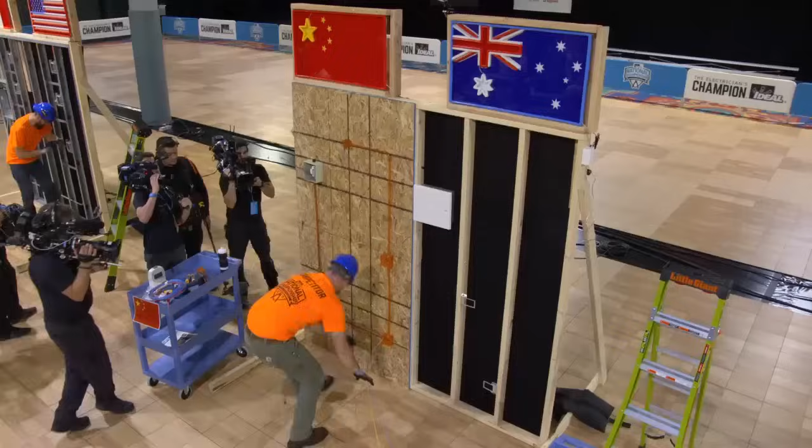Greg's working with wire colors that we normally don't work with in the United States here, but he's making it work. You can see he's trying to get the wires through, but he had to break apart the fitting right there. I really like that, how you can see the wire going up inside the conduit. If it gets hung up someplace, you just take apart the fitting, no glue involved, and push the wires right up inside. You can see the wires getting bunched up there a little bit. The conductor size, meaning the gauge of the wire, is a lot smaller than we're used to working with, so the wires will bunch up a lot easier.

Greg Anlicker's wife, Joni, looking on.

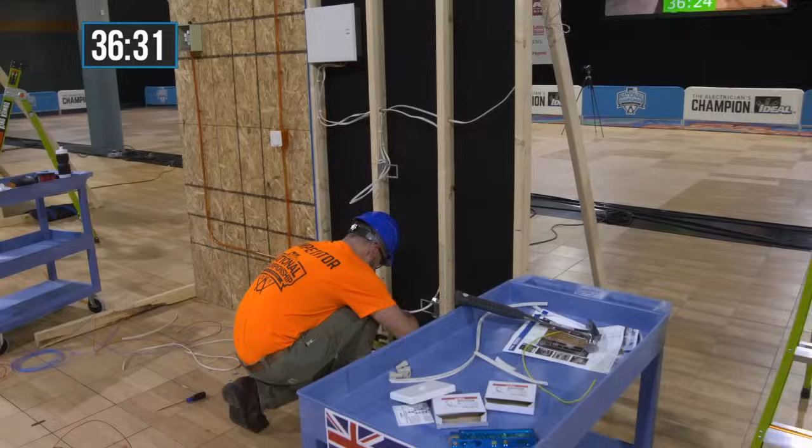Looks like we're having some technical issues down on the floor. Chip, what's going on down there? It appears Greg Anliker has completed the Chinese section of the challenge and moved on to the next phase. His light, however, is not coming on. We'll stay tuned to figure out what the issue is. Is it his wiring, or is there just something going on with the light?

The rules state that a competitor cannot go back to a stage that they've already moved on from. So if Greg did make a mistake on his wiring, he can't go back and fix it. We'll have to wait and see what happened.

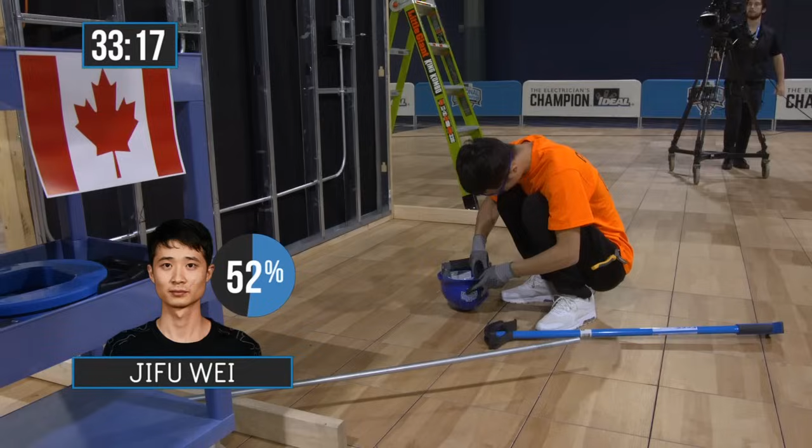What's going on here? Jifu Wei has lost his helmet, and the rules state that if you do not have a helmet, you cannot do any work. Well, it looks like he's trying to put it back together. He should be okay. And a helmet comes from out of nowhere.

There's a Texas flag. Is that Jeremiah Bibby's helmet that came flying in? Let's see. Yeah, it is. I mean, everything's bigger in Texas, but it's not supposed to appear out of nowhere. And so Chip is downstairs. Chip, what is going on down there?

All right, baby, what just happened? Well, our friend here lost his hard hat. It got all broke, so I had mine in my backpack. I was like, hey, he needs a hard hat. Safety first, right? Got to protect the brain. So I was like, hey, man, go for it. So he's wearing our hard hat. So now our Chinese competitor has a hat with a Texas sticker on it. Just making sure we all understand what's going on, Dallas Cowboys. Absolutely. But all in the name of helping. That's right. Thank you for your generosity. Absolutely. Look at that, they don't know each other. And he saw a guy in need from a different country and tossed him his helmet to make sure he could do the work. Jifu Wei is no joke. He's there, and he is a machine.

USA is the chant from behind Greg. Everybody's got beards in the U.S. side. The U.S. and Canadian fans, a little call and answer.

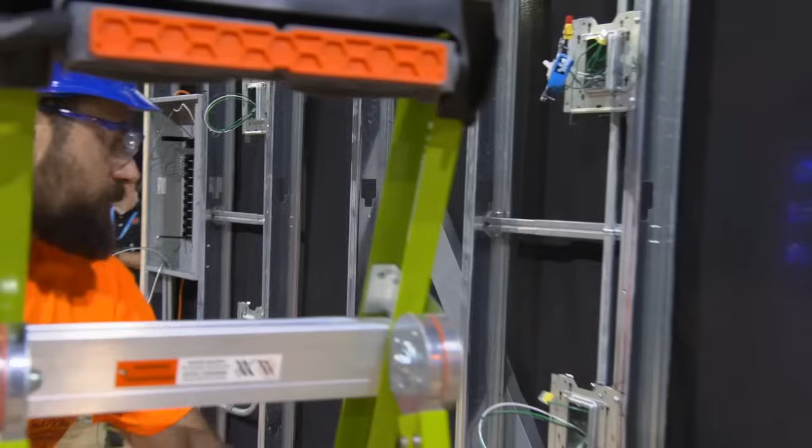Time winding down in the International Championship. Paul Hanania, Greg Anliker, what are they doing right here? Well, you can see they're making up all the connections right now. Greg's stripping the wires with the T-stripper there, and he's pushing them in. And he's also got the armor band wrapped around that receptacle. That's real critical.

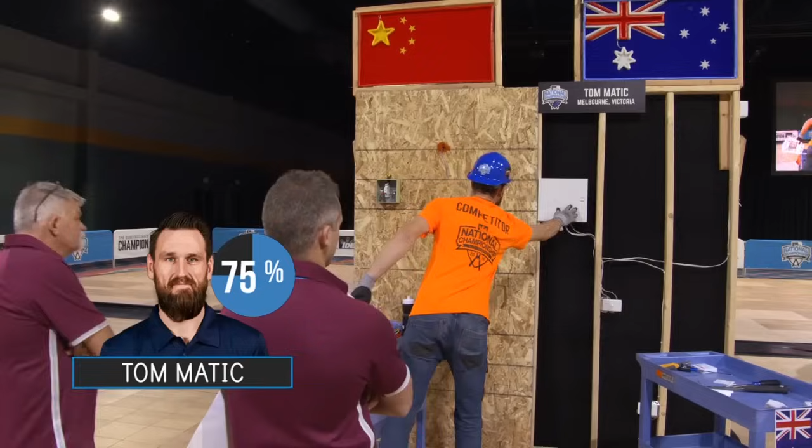See the focus in the eyes of Greg Anliker, the U.S. champion, trying to become the very first international champion. Tom Matic trying to finish that up. Let's see, close the door, and there is the signal that he's done with the Australian portion of the wall. Now Greg Anliker is done, but again, he has one portion of the wall that did not light up. Looks like the China portion of the wall didn't illuminate. Not sure why.

Let's check in with Chip and see what's going on down there. Chip.

You have to be just absolutely drained. I am. Luckily, it wasn't heavy stuff here. You finished before the time ran out. Everything looks good, all your lights seem to be on.

We got to figure out what's going on this side. Hopefully this is just a technical glitch with the light, maybe a bad bulb. Okay, well nice job, I know you pressed hard. Congrats on finishing up. Thanks, we'll see what happens.

So we are being told now that there was a piece of wiring that did not go as planned for Greg Anliker, so it's not a faulty bulb, it's actually a misstep.

One competitor's done, and now two. Paul Hanania is done, and he is downstairs with Chip.

Wow, you worked effortlessly through this, it looked like. How was this challenge for you? Good, because it's quite familiar. So I wanted to save something I was more familiar with till later. Sure, and do the kind of weird things first.

So in the Canadian market and the American market, it's very, very similar. Very similar, but the Chinese equipment just seems very dissimilar to what you're probably used to. It is, but it's still pipe, it's still wire, there's a good comparison. Yeah.

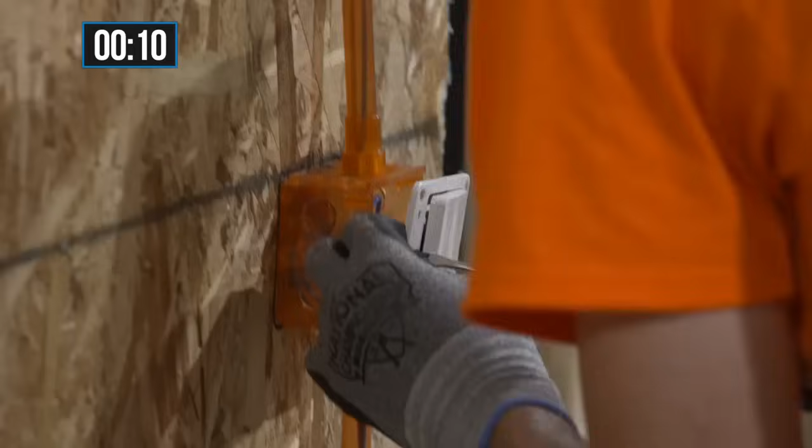The Aussie crowd at the very edge of the barrier in its seats. 10 seconds to go, will Tom Matic finish? All right, he's got to screw that device in, that's the final thing he has to do.

3 seconds, 2, 1, and he just got finished right at zero. Tom Matic closes the deal at the very last moment. What drama in the very first international championship, and the light goes on. The crowd goes wild, that is fantastic. What a finish.

A truly remarkable finish, and let's see if the craftsmanship and the work were good enough to overcome finishing last. Here are the results based only on finishing time. The American Greg Anliker finishing first, but will it be enough to turn his national title to an international title? Let's see if the Aussie Tom Matic has the craftsmanship and the work good enough to overcome finishing last.